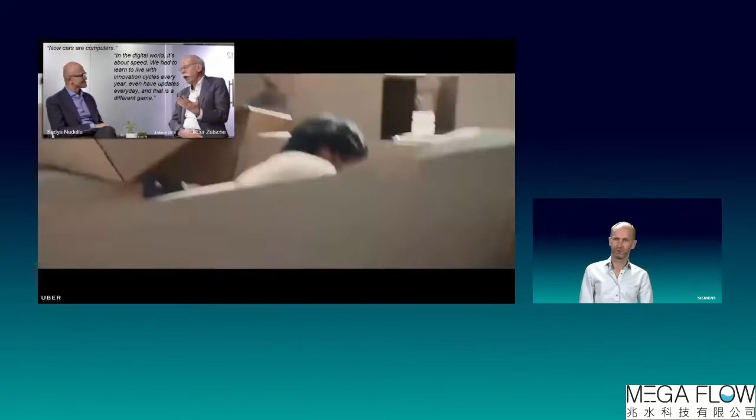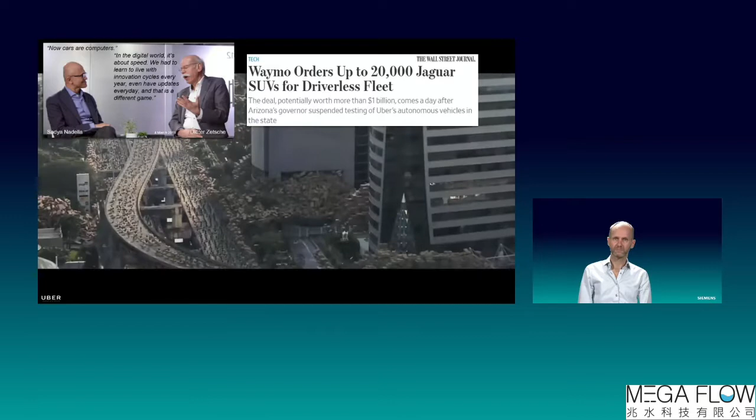And the industry recognizes that. It has a massive impact on how we look at vehicles. And for example, Satya Nadella from Microsoft, in a discussion with the former CEO of Daimler, recognized that cars are no longer cars, but actually become computers on wheels. It leads to situations where technology companies are in a position to order 20,000 vehicles at a traditional car OEM, and with that dictating the pricing of vehicles.

We see companies like VW and Ford, competitors for the past 100 years, finding ways to jointly invest in autonomous vehicle technology. We see NVIDIA and Mercedes partnering up, where NVIDIA is the first company to be mentioned in the announcement at Forbes, and where Forbes also highlights the importance of the new business models that we'll see with electric, connected, autonomous and shared mobility.

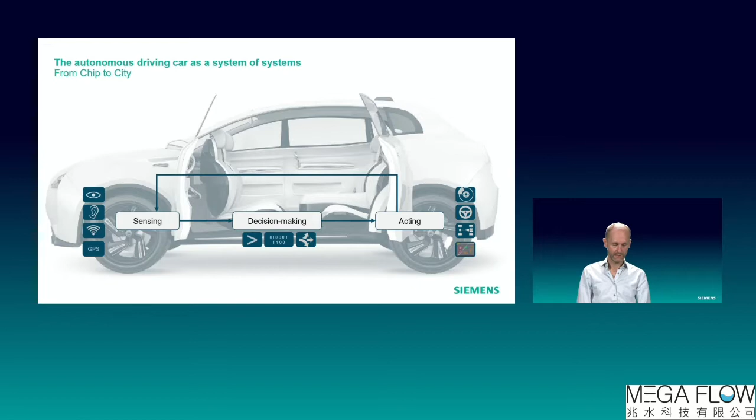Hyundai and Aptiv put up a joint venture now called Motional, deploying self-driving robotaxis in US, Korean and Singapore city landscapes. So what impact does that have? If we look at autonomous vehicles as computers on wheels, it is a control system that takes in sensor data, that fuses that sensor data into meaningful data to determine a path and to derive actuator outputs. These actuator outputs lead to vehicle behavior and to interaction with the environment and other traffic agents.

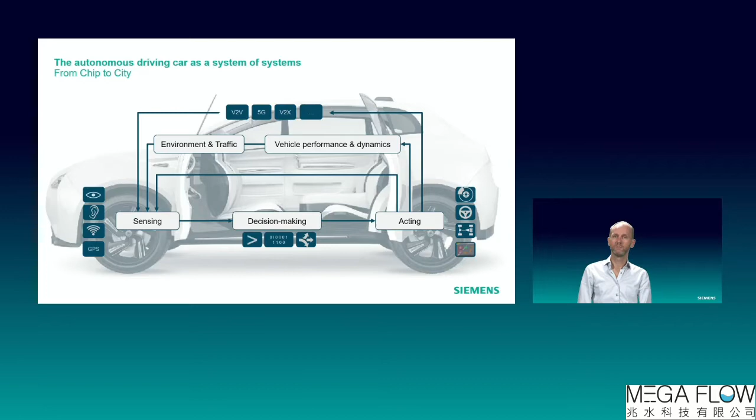And soon we will also see direct information coming into that control system from vehicle to vehicle communication and vehicle to infrastructure communication. We as Siemens take a perspective, what we call from chip to city, meaning that we support digitalization at the level of the chip and the core electronics. We model and digitize system level solutions, sensor simulation, controls for perception, controls for planning.

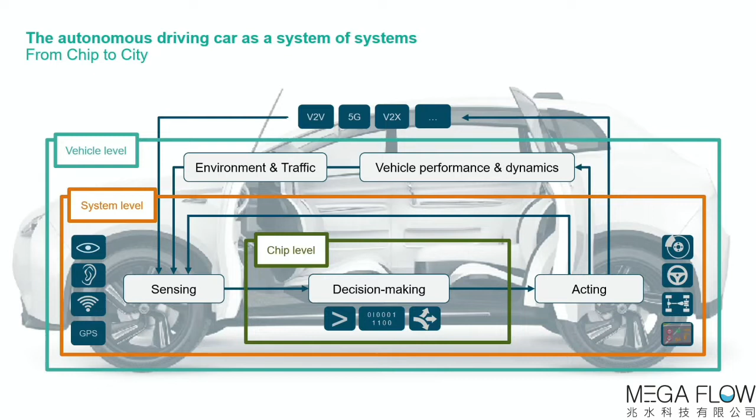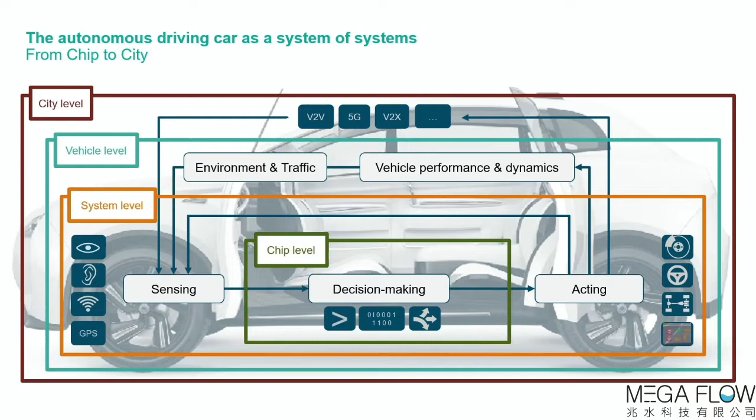We model and virtualize the vehicle, chassis systems, powertrain systems, entire vehicle configurations, including the sensor integration part. And finally, we put these simulated vehicles in a simulated environment. So we build a digital twin from chip to city, and we support and enable digital continuity throughout that supply chain, from the chip makers to the electronics companies, into the traditional tier 1 suppliers and the OEMs, up to vehicle levels where cars become part of a system of systems.

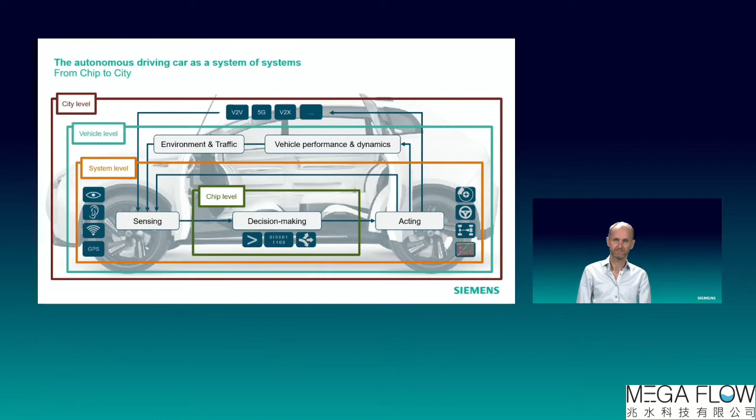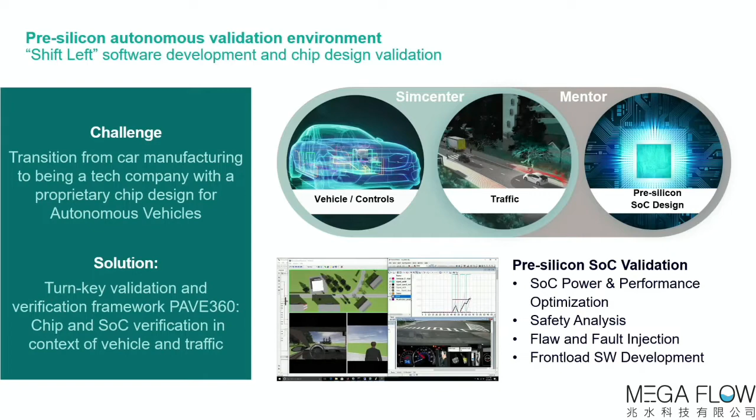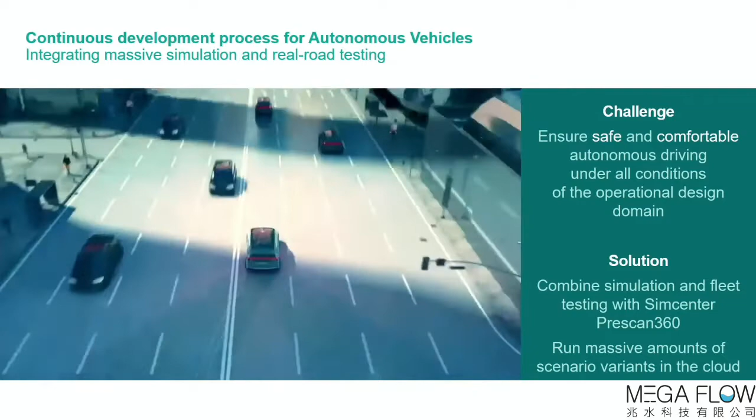So how we do that is then depicted on the following slides. So starting off with the chip level offering, we bring the capability to model chips in simulation and emulation technologies and couple these virtual chips into a realistic testing environment for automotive use cases. That simulation environment at the level of the vehicle and the systems is, for example, being used by Hyundai Mobis to build up an integrated engineering process of data collection with engineering fleets, as well as massive virtual validation and verification cycles.

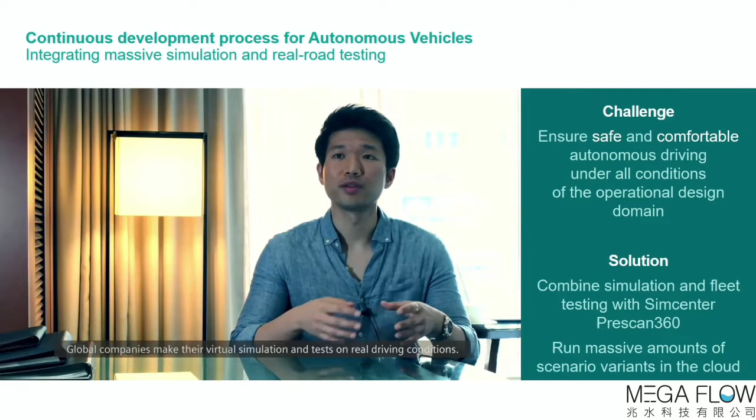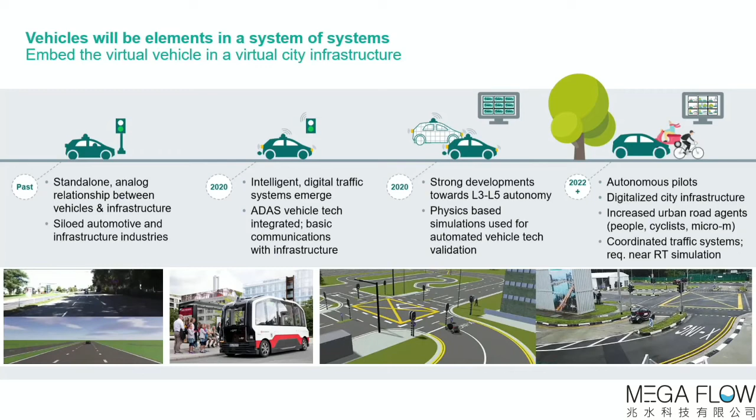So with that new reality of computers on wheels also comes the need for a new development process, where the traditional automotive industry works along the lines of a V-cycle, where at the end of that V-cycle, the product is done and being sold to an individual buyer. We move into a new reality where when the product is done, it starts to collect data in real life.

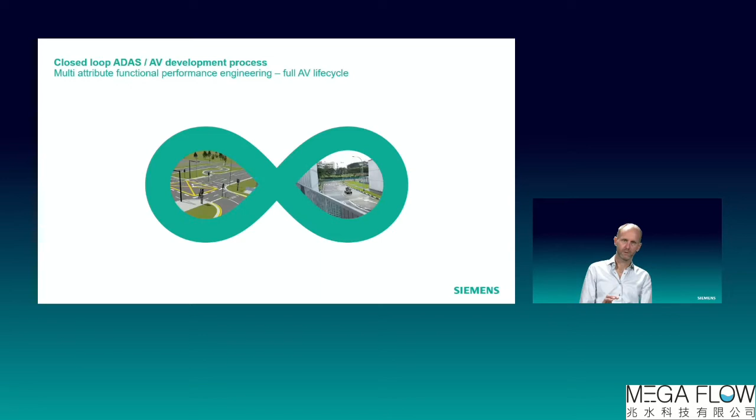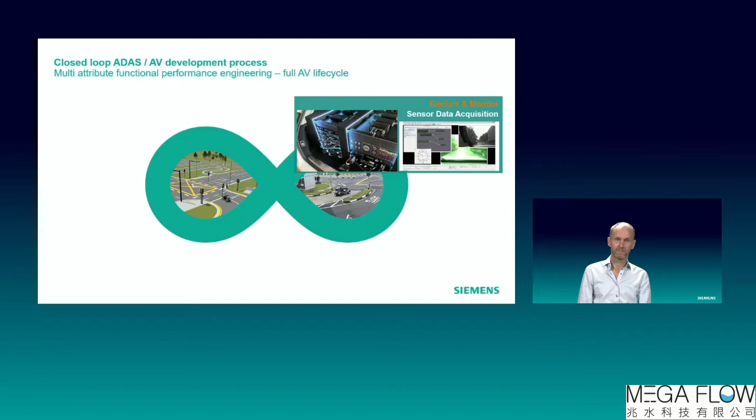With the Simcenter portfolio for the development of autonomous vehicles, we support this closed loop engineering process, meaning that we enable the data collection of raw sensor data on real roads, capturing massive amounts of camera, radar, LiDAR, CAN, GNSS data in a synchronized manner. We bring the capability to process that data, to analyze and diagnose that recorded data for either the creation of data sets for training of neural networks or for the identification of critical scenarios for validation and verification.

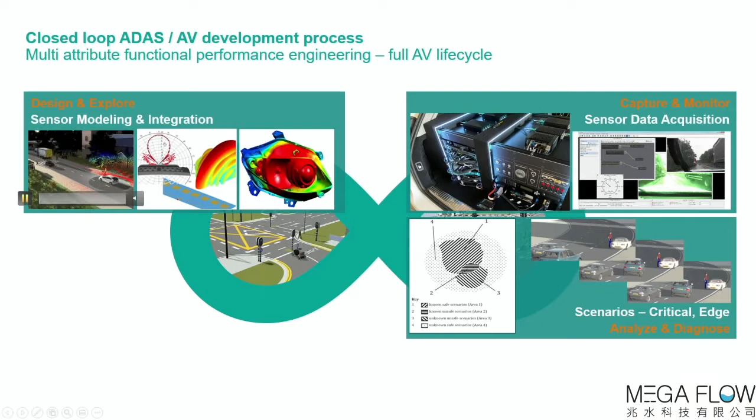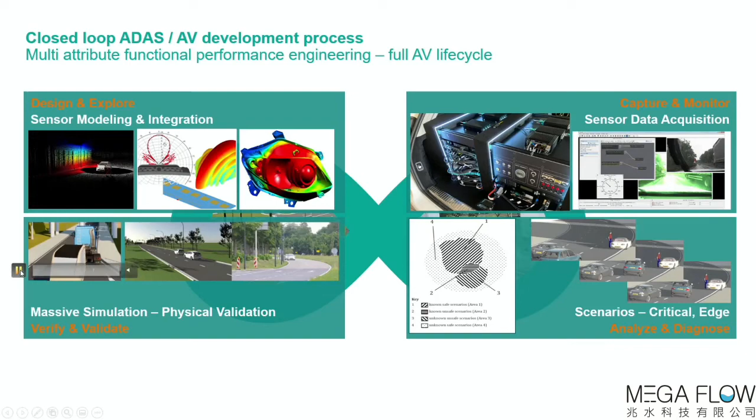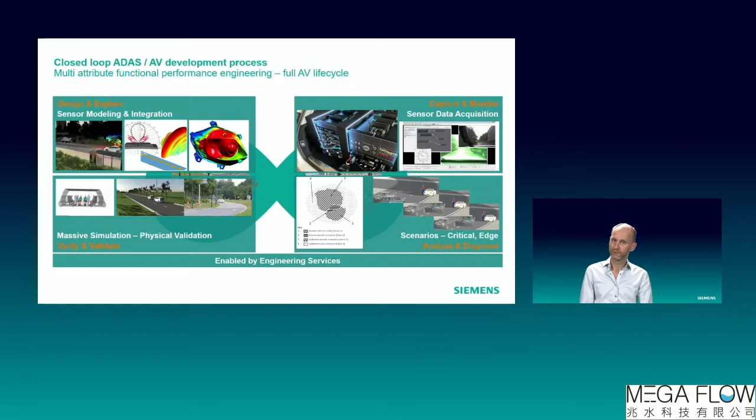Then we support the design and exploration phase with sensor simulation capabilities at the level of the sensor, at the level of the sensor within the vehicle context, and also with sensor models on vehicles that drive through the environment. And then finally, when we have supported the design of these vehicles, we bring the capability for both virtual as well as physical validation and verification. Starting off with pure virtual, massive validation and verification through real-time testing, hardware in the loop, software in the loop, vehicle and driver in the loop, up to the point where the vehicle is ready to be tested on proving grounds and in actual traffic.

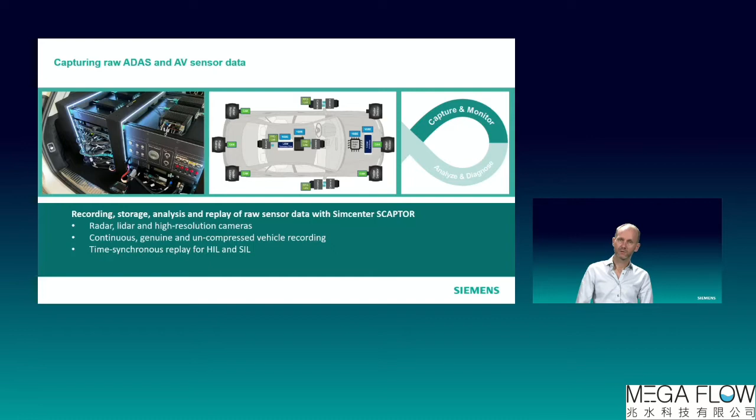So if I move through that loop and through the phases of that loop and illustrate that a bit more, we start off with the capturing and monitoring stage, where we deliver onboard data acquisition systems with massive storage capabilities to capture raw data. So terabytes of data that at the end of the day can be uploaded into the cloud to become available to the engineering community. Part of that solution is also the real-time playback for hardware in the loop and software in the loop setups.

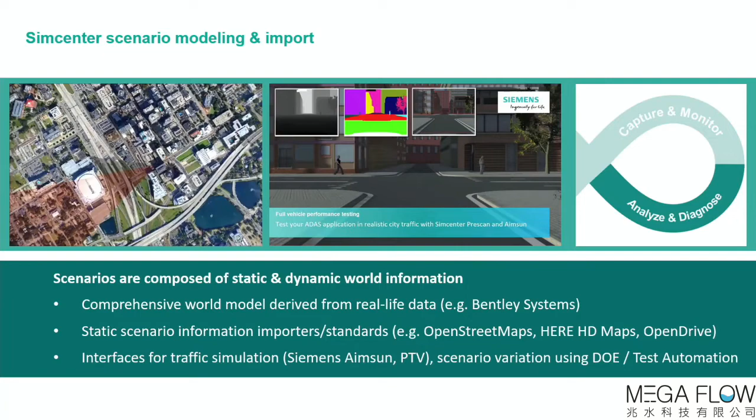If I have collected data, it's not straightforward to use that data. So a lot of the services that we bring today is to come from recorded data to what we call meaningful data, and to ensure that you can use that data in virtual environments. So the transition of recorded data into virtual data is a very important step. And in that step, we rely strongly on standards like the OpenSCENARIO, OpenDRIVE standards. But also what we bring there is a capability for what we call design of experiment, identification of critical scenarios that are not seen on the real road.

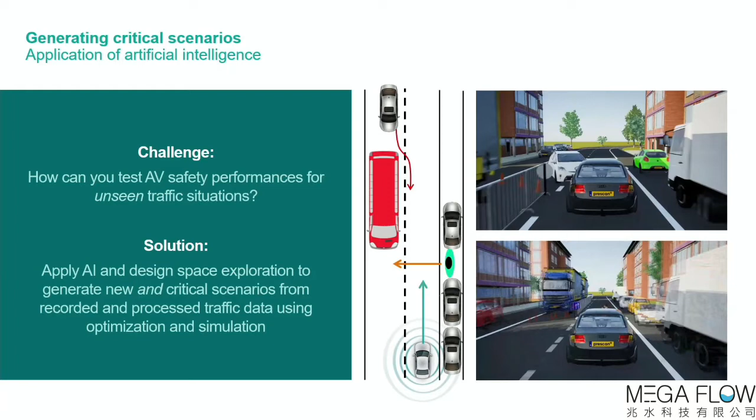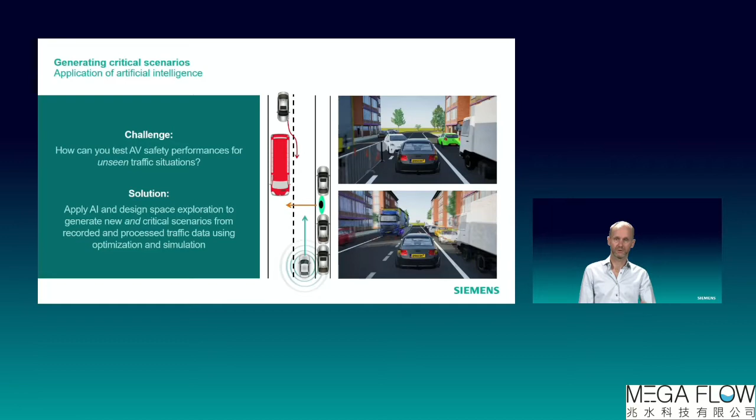Because the key challenge of verification of autonomous vehicles is to test vehicles against the critical scenarios. And a lot of critical scenarios come out of recordings on the real road, but there will never be a situation where all critical scenarios can be captured with data recording systems. And that's where design space exploration techniques come into play, where we start off from known scenarios, but generate unseen, unknown critical scenarios in line with the standard for SOTIF, the safety of the intended function, to grow the scenario space for testing self-driving vehicles beyond the situations that are known.

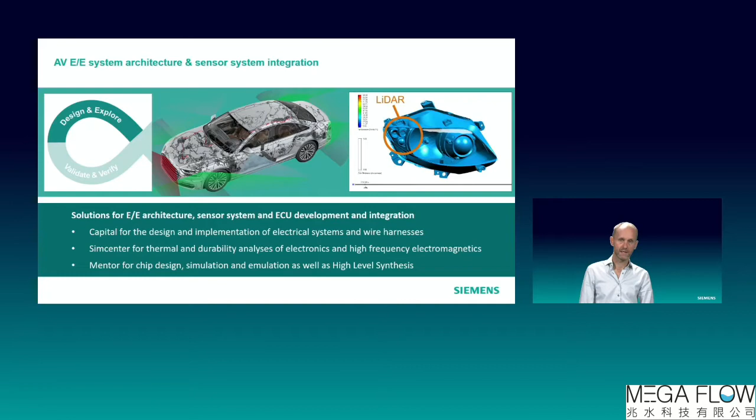So having recorded data, having analyzed and diagnosed this recorded data, we move into the stage of design and exploration. Starting off from functional requirements and functional architectures, deriving domain-specific architectures for the electric systems, for the network design, for your embedded software design. We bring solutions to the industry to design these systems and to integrate these systems in a specific vehicle context. That also applies for sensor technology: assessing the impact of a position and location of a sensor in a headlamp or behind a windscreen or behind a bumper, and what that does to the quality of the signal of the camera, the LiDAR, the radar, are capabilities that we bring to our customers.

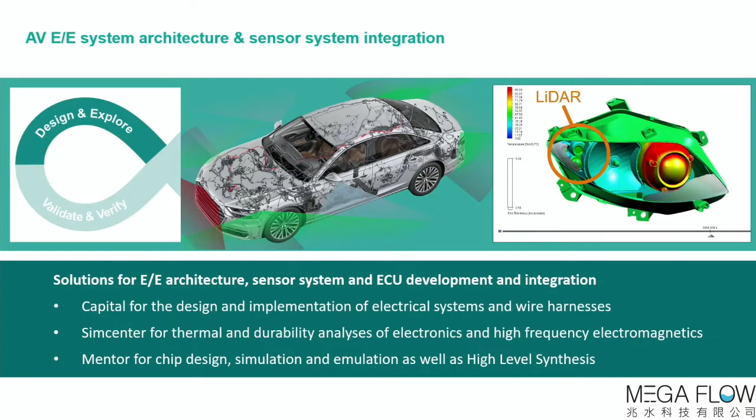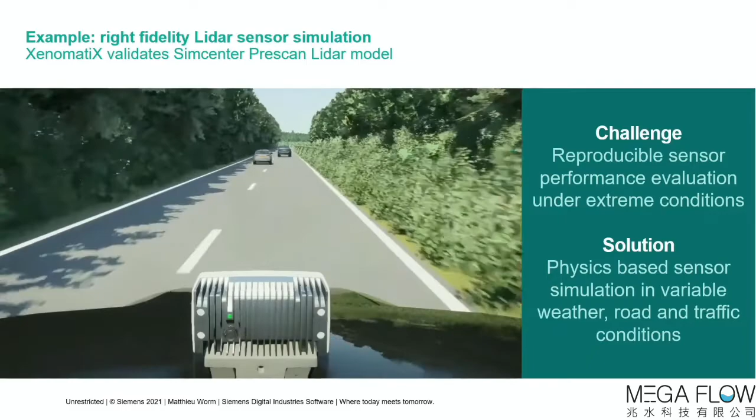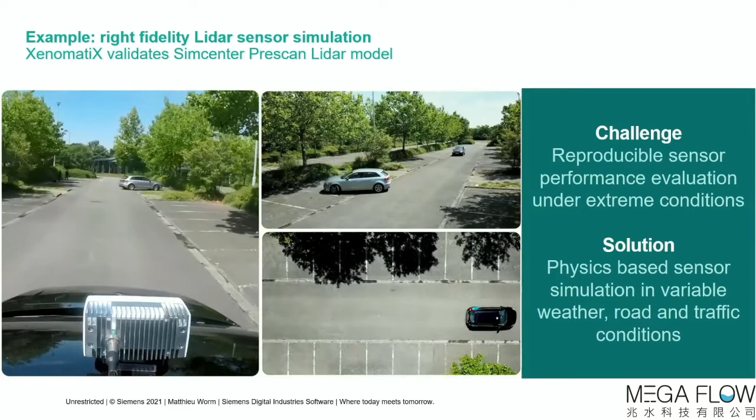And an example there is a startup in the LiDAR domain, XenomatiX, developing pure solid-state LiDAR systems. We worked together with this company on the validation of our physics-based LiDAR model, putting XenomatiX in a position to virtually design their sensor system and, for example, also their perception algorithms. So we generate here a point cloud that is similar to the point cloud that they can develop by driving around with that vehicle.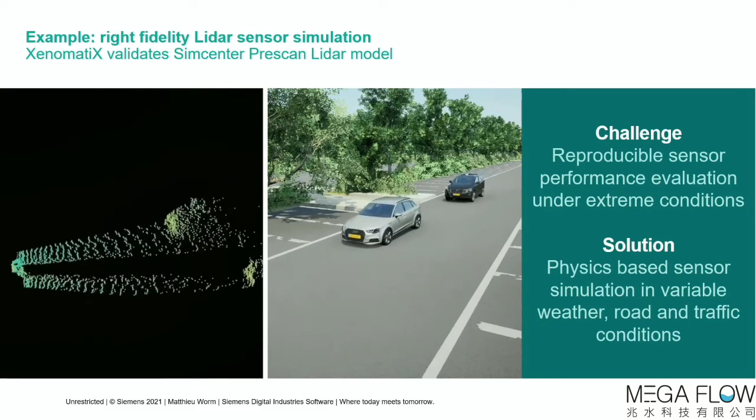Having a good model of your vehicle and a good model of your sensors, and having that digital twin of the world, these test scenarios that you want to use for the validation and verification of your systems, puts you in a position to start running big amounts of simulations. And the challenge there is to orchestrate that process, to be able to automate a lot of steps in that process. And that's what we bring to the table with Simcenter Prescan 360.

So having the capabilities to start off with a vehicle model and a basic set of scenarios, generating many variants of these scenarios with different weather conditions, with different road friction levels, with different speeds of the objects in the environment, with different qualities, signals of the sensors, so taking into account sensitivity of sensors. We can run all these different scenarios in a cloud or cluster environment and also automatically post-process these results.

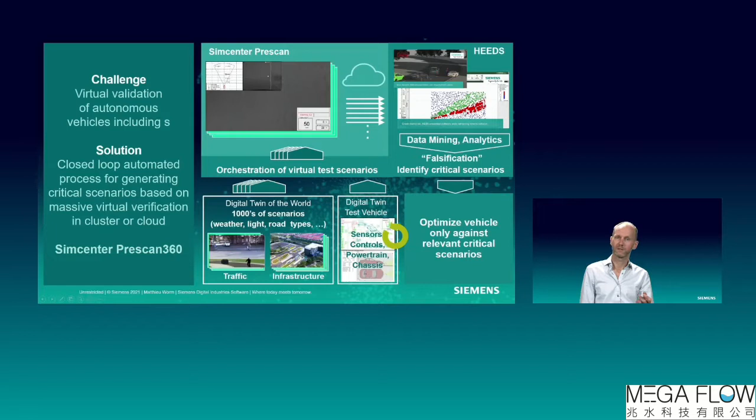So generating insight that shows which scenarios did not result in any dangerous situation, but also identifying the situations where there were actually false positives of the systems, and obviously also identifying the domains where the safety system was not capable of preventing an accident, and then bringing insight into the severity of these accidents.

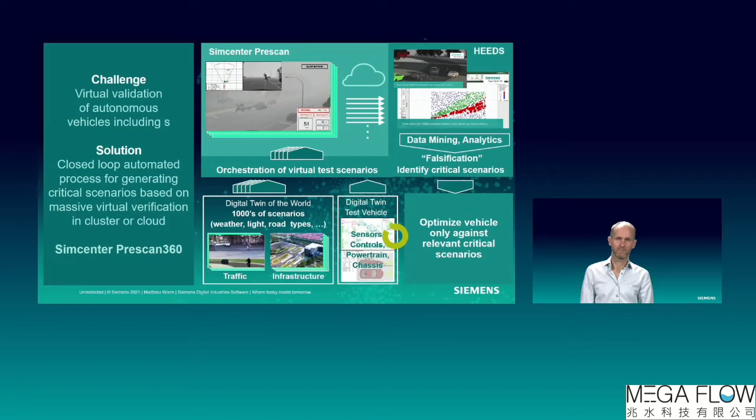Bringing that insight puts you in a position to start a falsification approach, meaning that you can actively search for the scenarios that make your controller fail. And that puts you in a position to optimize your vehicle against relevant critical scenarios, rather than testing your system for a large number of miles or a large number of scenarios, not knowing if you have really found the critical domains of your system.

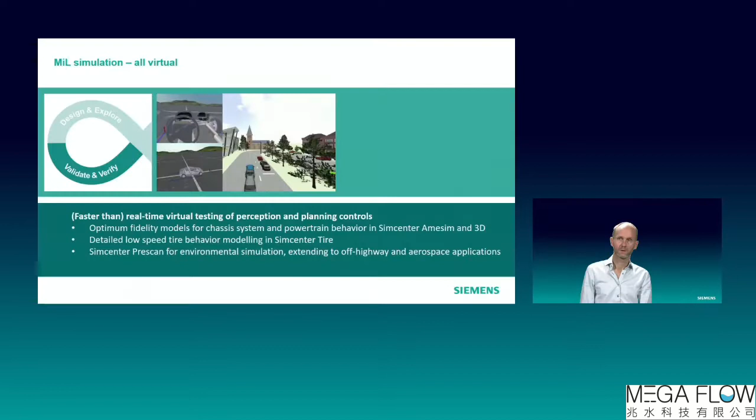So we simulate the vehicle dynamics, chassis systems, powertrain systems. We can put these detailed vehicle dynamics behaviors in a virtual environment and, for example, develop autonomous valet parking systems where also tire dynamics are taken into account. So low speed tire dynamics are very complex behaviors. Not taking these into account can lead to a controller design that is not functioning in real life as you would expect it to behave.

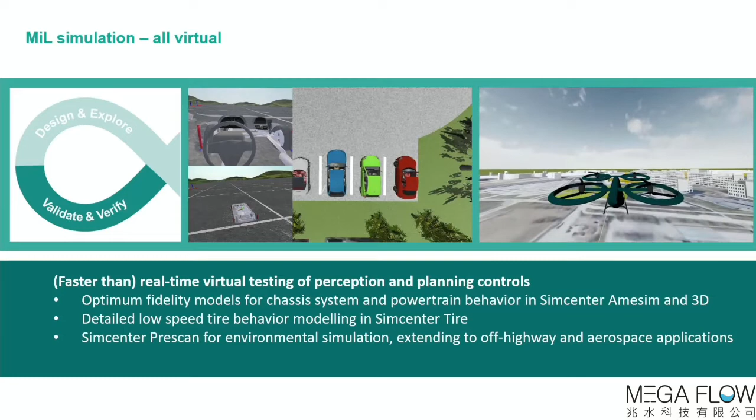On the right side, you can see a movie that illustrates the fact that we go beyond the automotive industry when it comes to supporting the development of autonomous systems in the agricultural industry, in the heavy equipment industry, but also in the urban air mobility solutions, where we see a big trend these days for the development of drone kind of robo-taxis that need to fly at relatively low heights, need to stay away from objects, unexpected objects, so more extended sensor systems are being used, and we're able to model not only the dynamics of these flying objects, but also the sensor systems of these vehicles.

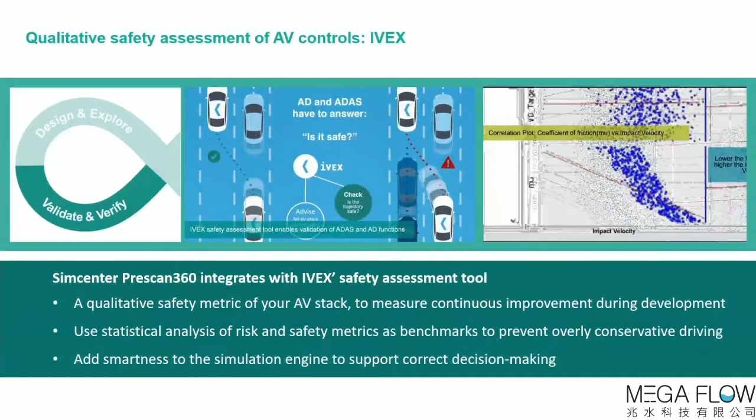Doing an assessment of the safety performance of the different systems is not straightforward. There are static metrics like time to collision that you can measure. But if you would like to develop a system that is not overly conservative, so that keeps driving in situations where it can drive and that can speed up to comfortable velocities, you need much more smart metrics than these static metrics.

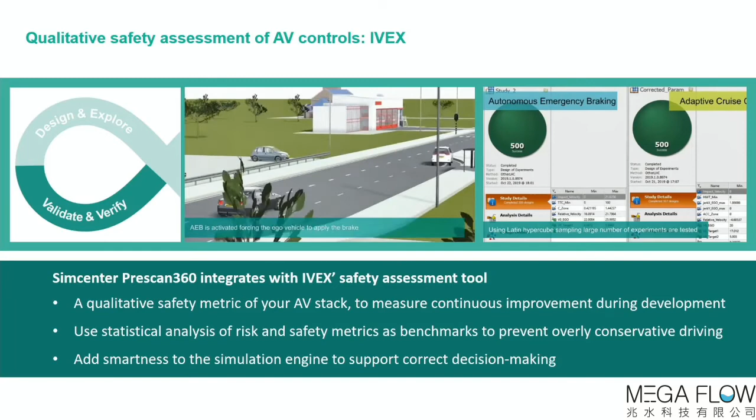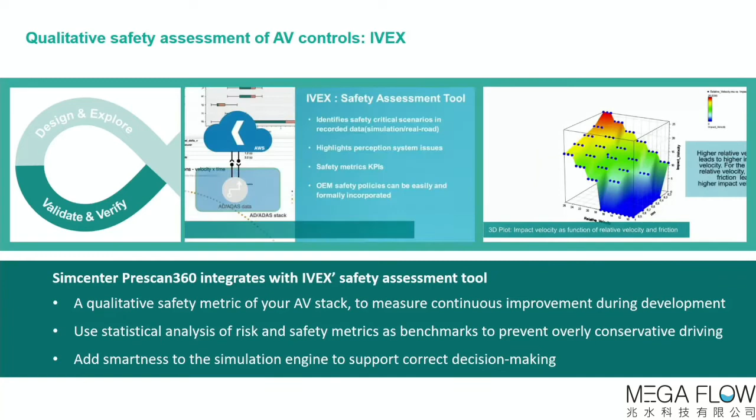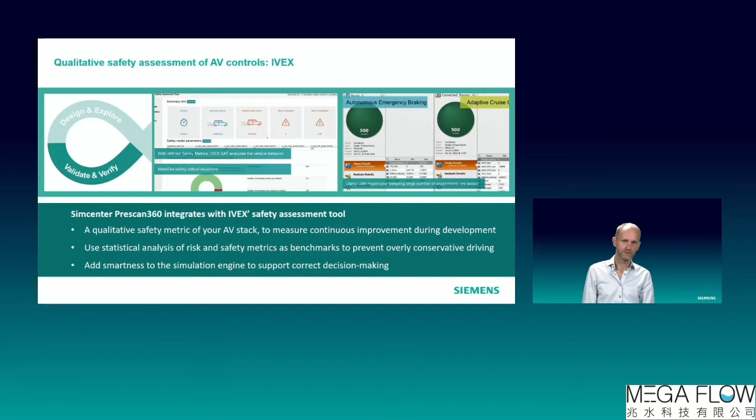In this context, we work together with IVEX that has developed the safety assessment tool that continuously calculates a safety envelope around the vehicles, so 20 times per second reassessing the required safety distance towards other objects, and we coupled that metric into what I just presented called Simcenter Prescan 360, into that massive validation verification environment, to automatically bring insight in the domains where the vehicle has most difficulties. And for example, finding out that under specific weather conditions or specific lighting conditions, your vehicle is most challenged by the system to behave safely.

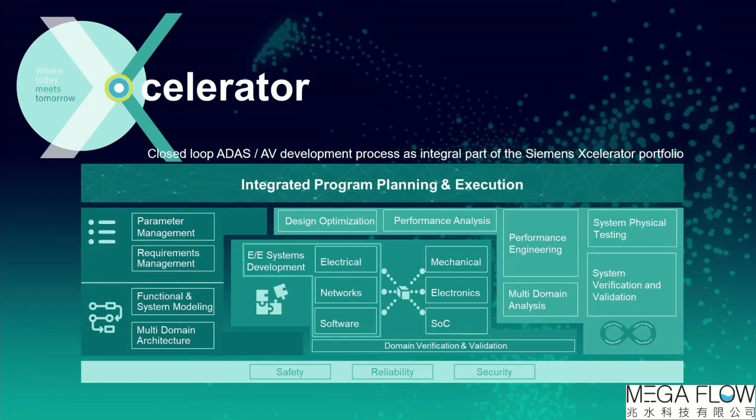Then I'd like to close off with fusing that infinity loop picture, that closed loop engineering picture, into the larger context of the Siemens Xcelerator portfolio. So where the Xcelerator portfolio supports model-based systems engineering, starting off with requirements, starting off with a functional architecture, bringing the capability to digest requirements and architectures into domain-specific architectures and requirements that can be given to the individual teams that develop the electronic systems, the network systems, the software systems, but also the mechanical parts and even the core electronics and system-on-chip solutions. What we bring with Simcenter is an environment to do design optimization, to do an analysis on the different performances and also multi-attribute performance verification.

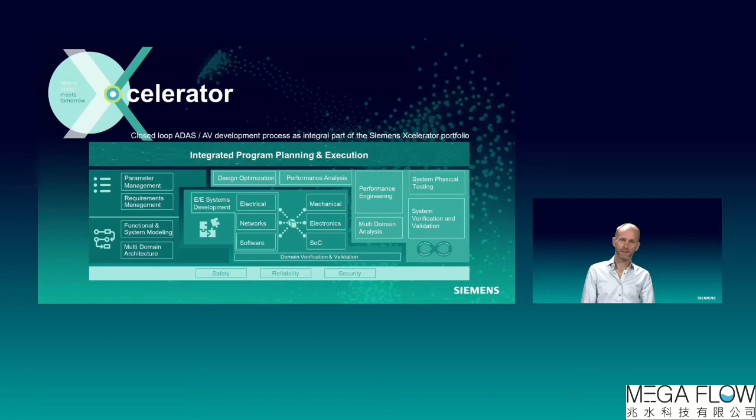But probably key in the domain of autonomous vehicles is that we bring the capability to collect data, to digest collected data, to support the design of perception systems and integrate these perception systems into a vehicle context, and then to run first massive validation and verification cycles, and finally move to the point where you can put the vehicle on the road and start to collect again data with these developed cars. So that's what we call closed loop development for ADAS and AV technology from chip to city.